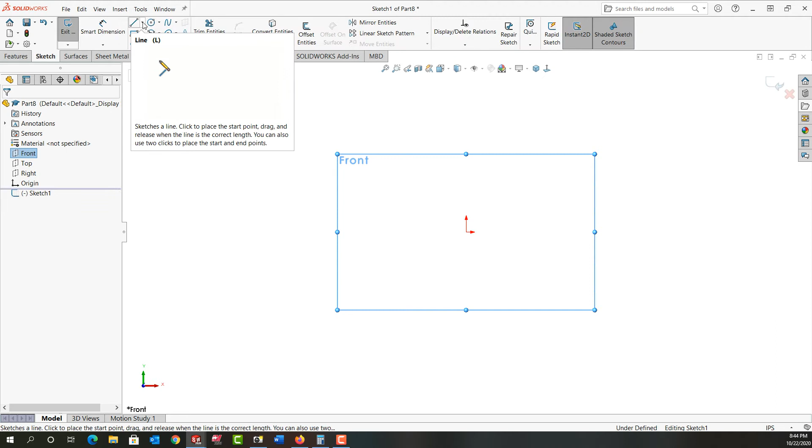In this video, I'm going to demonstrate how to create the nut that will pull the collet back and lock our part. So first, I'm going to Control Tab to my other open document. I'm going to select the front plane, and I want to make a revolve boss. Start with a center line. Push Escape. I'll use mouse gestures to activate line.

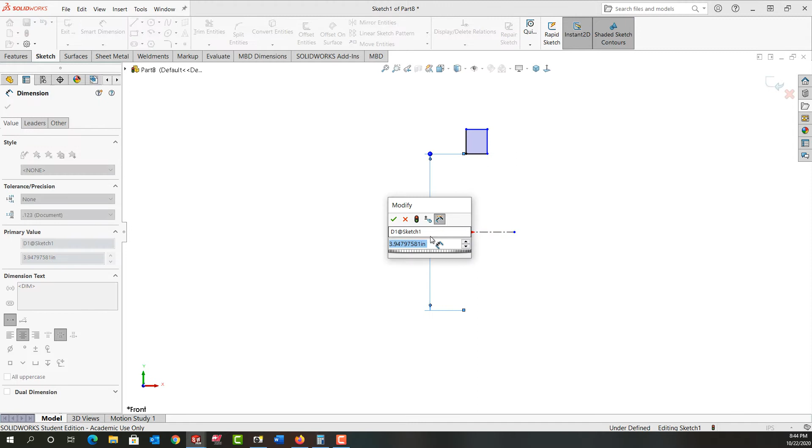And all I'm going to draw is a rectangle. This is a very simple part. I'll activate Smart Dimension with mouse gestures. And I'll dimension this. So the ID of this will be slightly under 3 inches. So I'm going to put the equation to calculate the depth of the thread for this internal thread of the nut. So I'm going to put a bracket here.

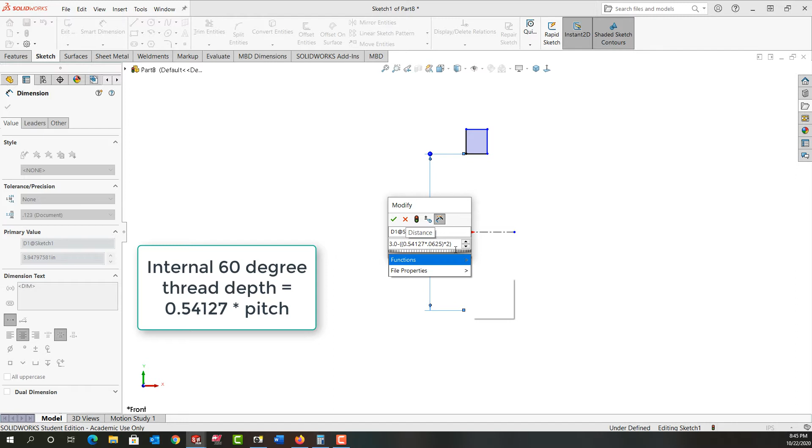Now because this is an internal 60-degree thread, my equation is now 0.54127 times the pitch, 0.0625, bracket, and again it's times 2 because this is a radial calculation, and I'm working with a diameter here. So I'll say OK. It calculates it for me. I'm going to push Escape.

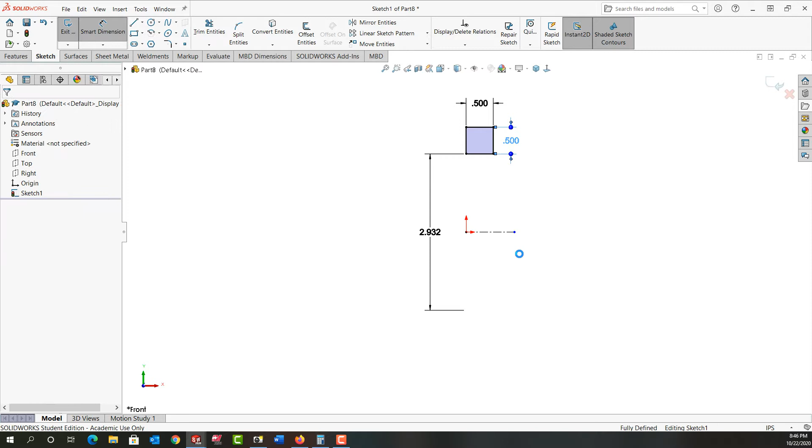I would like the thickness of my nut to be a 1/2 inch, and then I just need to think about how thick I want this part. So again, I'll select this, I'll click, and I'll make it a 1/2 inch. My sketch is fully defined. I'll right click and exit the sketch. There's only one center line, so it does a full 360 revolve, and I'll say OK, and I'll fit the geometry to the screen. Like my other parts, I want an internal thread here.

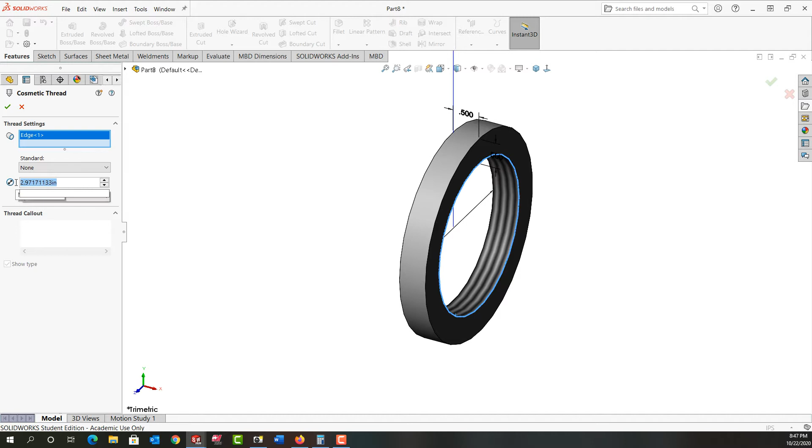So I could use the thread wizard, but I'm just going to go Insert, down to Annotations, and again I'm going to insert the cosmetic thread. So I'll select this edge. You can go through all or up to next, it doesn't matter. So the diameter this time is 3 inches, and the thread callout again will just be 3-16 for now, and I'll say OK. So if I expand the revolve, we see our cosmetic thread.

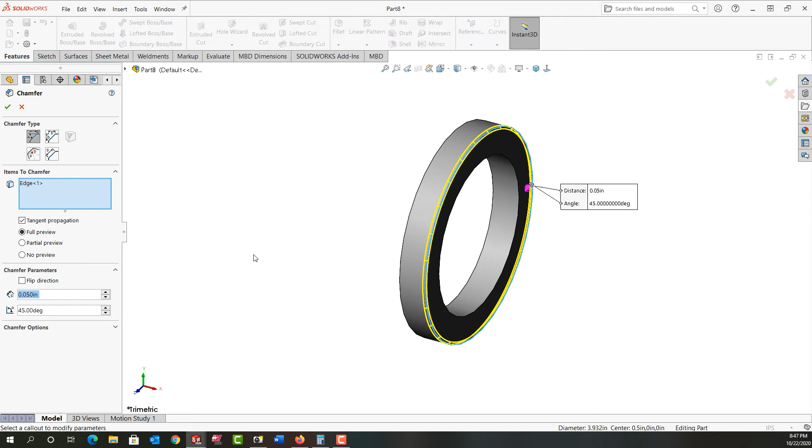I'm going to right click and shut off the annotations, and I also want to chamfer these corners. So I'll select the corner, select chamfer. 50 thou will be fine. Again, 50 thou here and here, and I'll say OK.

And the last thing I want to do for this nut is think about how I'll tighten it. I could put a knurl here and just hand tighten. I probably will add a knurl later, but I also want to add some holes so that I can take a piece of pipe or a pin and use it to really snug it up. So to do that, you can select the front plane, go Reference Geometry Plane. I want to create a parallel plane that's tangent to this face.

I'll right click to accept that, and in this plane I'm going to create a hole wizard. I just want a standard drilled hole. Just want to think about the size of the pin I would use to crank it tight. So I'm going to bump this up to 3/8. I don't want it through all. I'm not going to put a countersink on it because it's going into a curved surface. I do want to think about its depth, but we'll see that in a minute.

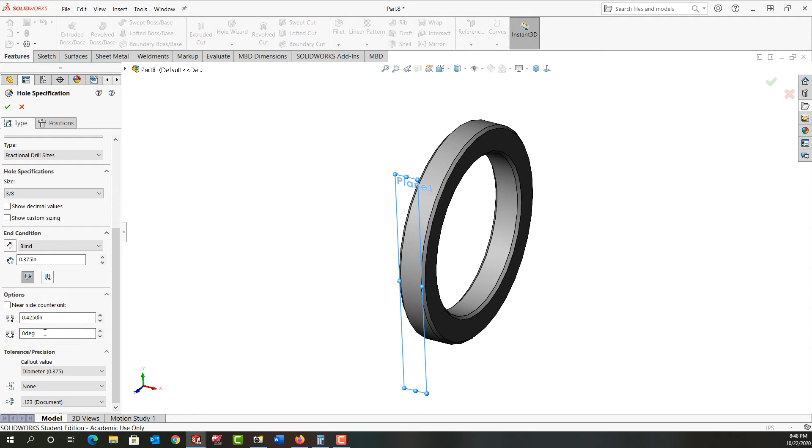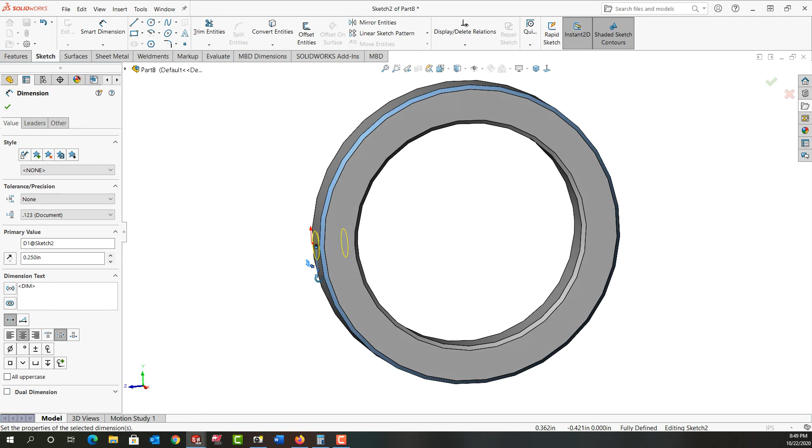I'll go to Positions. I'll look normal to, and I'm going to add a hole here. I'll push Escape. So I'll select the origin, select the center. I'll make these horizontal. Then I'll activate Smart Dimension, and I'll make this distance 1/4 to put it on center. And I'm going to rotate around to see the preview. And then I want to consider, is this too big of a diameter?

I'm going to say OK to the dimensions. I'll go back here to the size. It's just a regular clearance hole, but I'm going to make it a bit smaller. So I'm going to make it 1/4 inch, so there's plenty of material left on all sides. Again, I'm going to rotate around, have a look at the depth. If the depth is too deep, I'll change it.

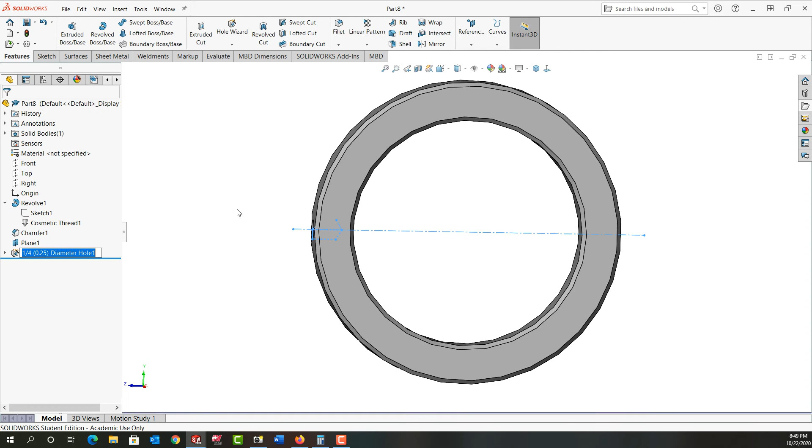But in this case, I'm going to say I want the depth to here. I want to think about where the drill point is. I don't want it breaking through. And I'll say OK to accept that. I'll look at it and find the plane that goes through the middle. I'll use this plane. I want to do a section view quickly, just so I can get a feel for what's in here. That looks all right, so I'll end the section view.

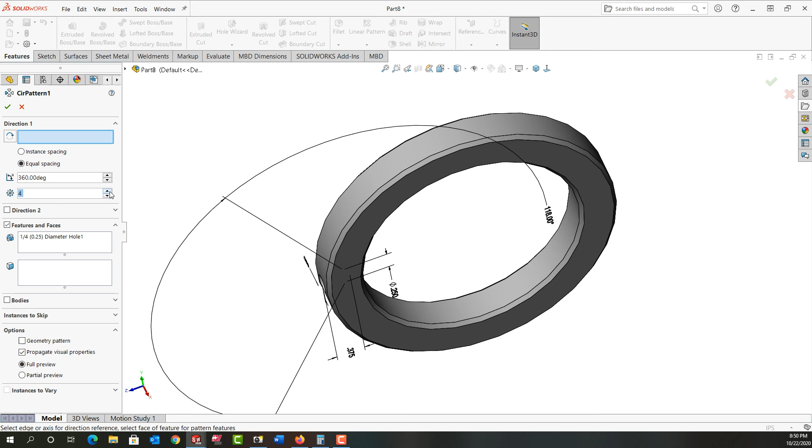The last thing I'll do is select this hole, then the down arrow below linear pattern. I'll create a circular pattern. I want 4 instances. For the direction, I'll just select the ID of the part. And I'm going to put 4 holes equally spaced around this. I'll say OK. Put it in the isometric view. I'm going to save this as the nut.

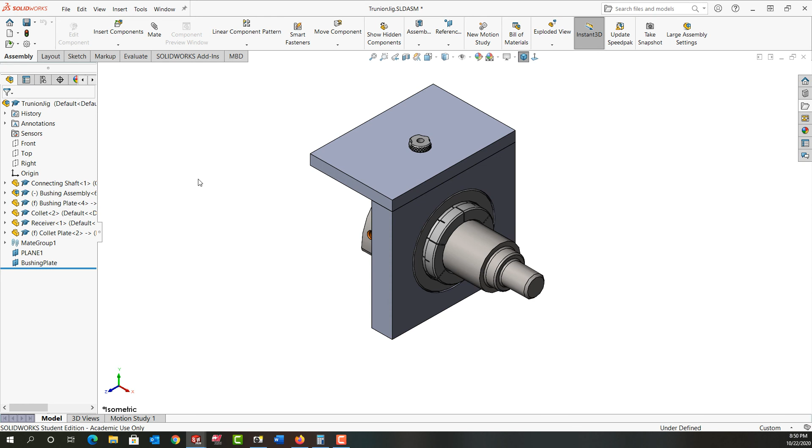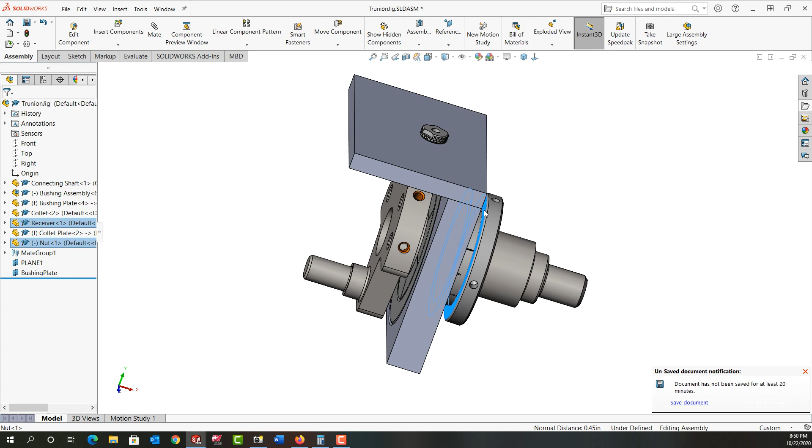I'll Control Tab back to the assembly, and I want to insert this into the assembly. So it's still open, I can select it here. I'll drag and drop it out. And I know I want this diameter and this diameter to be concentric. And that's good. I'm going to rotate around a bit. And the last thing I'll do is I'll lock this face to this face with a coincident mate.

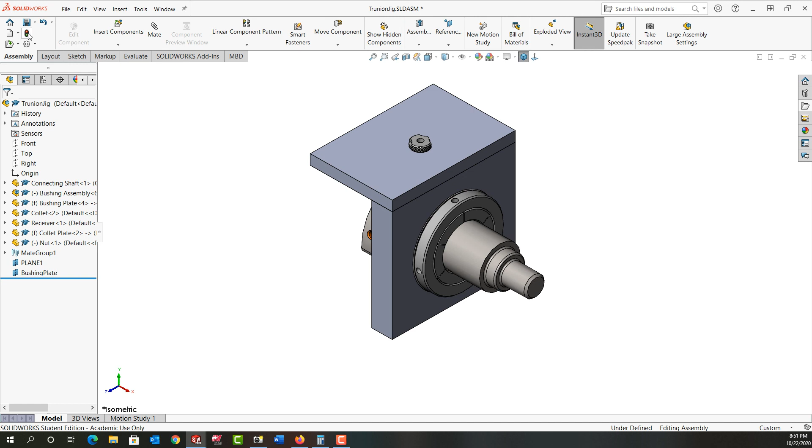Later I'll change and fix these mates so that the assembly behaves as it would in the real world. But for now, that's good. It still rotates, and that's fine. I'm not going to worry about that. But now I've created the nut and I've added it to the assembly. I'm going to put this back in the isometric view. I'm going to rebuild, save my work, and in the next video we'll continue from there.